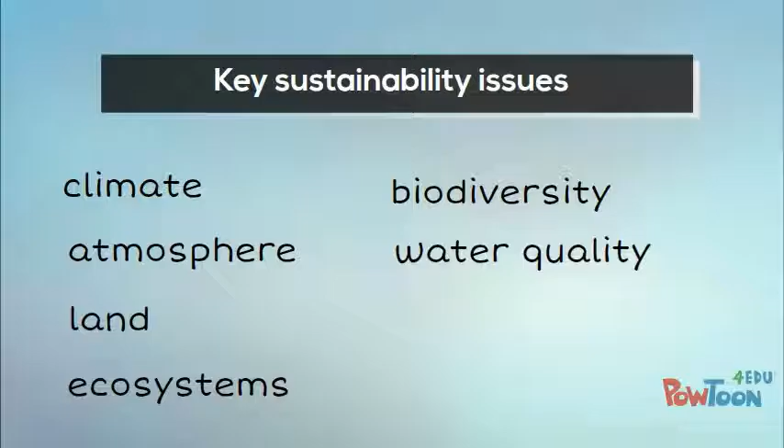natural environment. Unsustainable activities have led to changes in our environment or have been identified as having the potential to lead to future changes. The types of changes that are occurring or are predicted to occur form the key issues for sustainability. Key sustainability issues can be global and/or local, such as climate and atmosphere, land, ecosystems and biodiversity, water quality, waste disposal, and natural resource management.

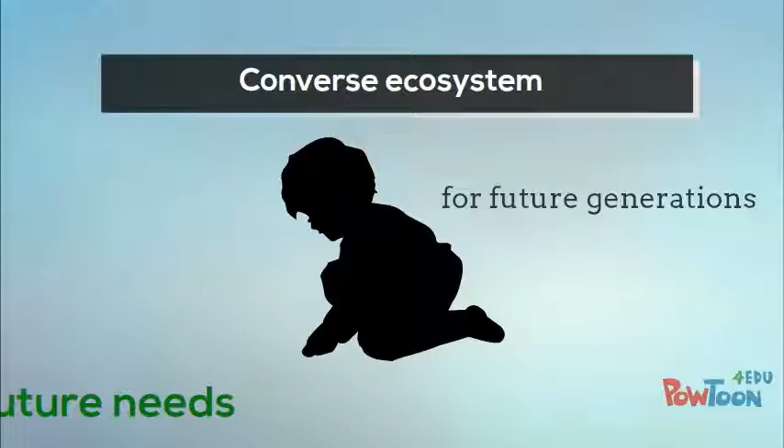Ecologically sustainable development is a major challenge for Australia. It is critical that Australia use its resources to develop industry and generate employment and thus meet the needs of Australians today, and that it use environmental resources in a way which maintains and where possible improves their range, variety and quality, while concurrently doing this in a way that conserves the ecosystem for the benefit of future generations.

Apparently, we are well on the way to doing this, but as new technologies emerge, things need to be re-evaluated. The government is amending the Australian environmental regulatory requirements, which includes large-scale wind farms and which subjects them to these requirements at each phase of the project. Thus, it is possible for sustainability and sustainable development to be used to balance competing interests and needs. To do this effectively, it is important to consider sustainable work practices and their management.

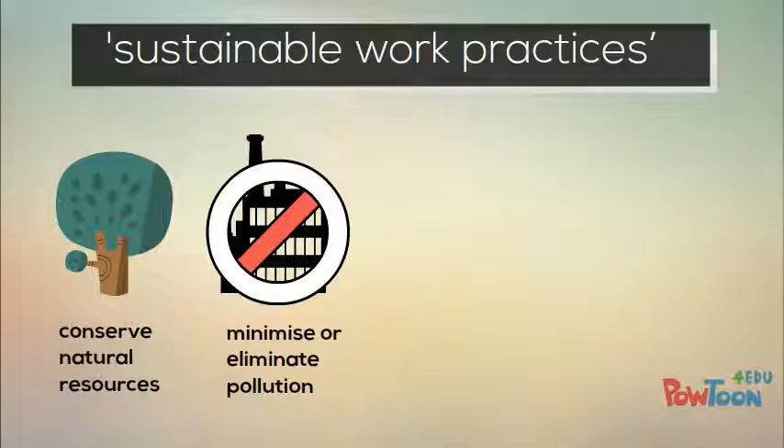Sustainable work practices include practices that conserve natural resources, minimize or eliminate pollution, are energy and economically efficient, and have a reduced impact on the health and safety of workers, communities, and the environment. What key strategies are used to manage issues? The primary role of wind farms is electricity generation from renewable resources, so it is a strong advocate for the promotion and implementation of sustainable and environmentally sound work practices.

The main sustainability energy principles and practices relevant to the renewable energy industry include the Operational Environmental Management Plan, which provides a framework for controlling potential operational impacts on the environment and which includes practical and achievable performance requirements, mitigation strategies, monitoring systems, reporting and auditing processes, and processes for implementing corrective action.

Environmental monitoring programs should include all activities that have been identified to have potentially significant impacts on the environment, both during normal operation and during unusual conditions, and should be based on direct and indirect indicators of emissions, effluents, and resource use, and be conducted by qualified personnel, following best practice monitoring and record-keeping procedures, and using properly calibrated and maintained equipment. Using renewable energy sources and reducing and effectively managing commodities such as energy and water.

Researching and adopting emerging technologies, including using energy-efficient devices or appliances to minimize energy consumption. Wherever possible, employing waste minimization strategies. Remember, these also have economic benefits and reduce operational costs. Let's look at some specific issues related to wind farms.

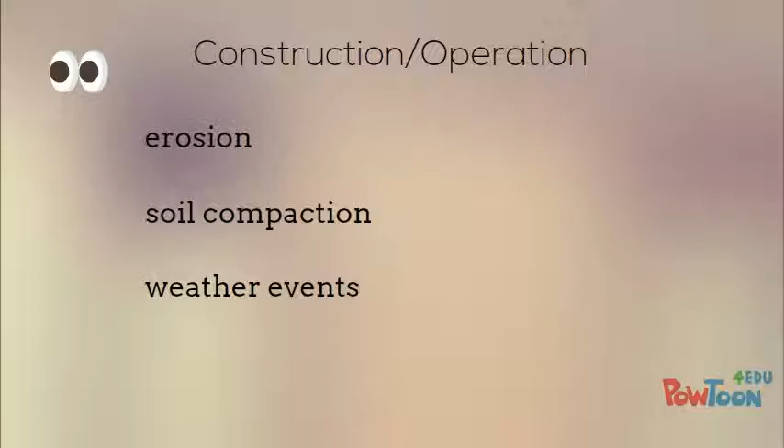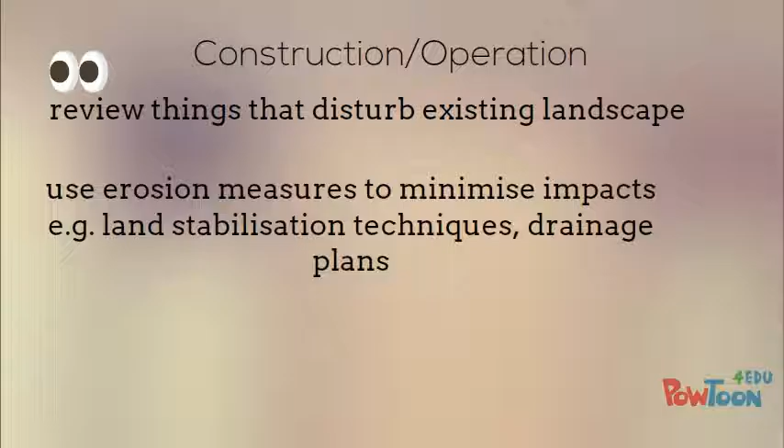Erosion, compaction of soil, and significant weather events, for example, which occur after periods of high rainfall, can affect the condition of the land and civil assets at wind farms. Implement appropriate erosion measures. Clear land promptly and revegetate with local seed stock of native species.

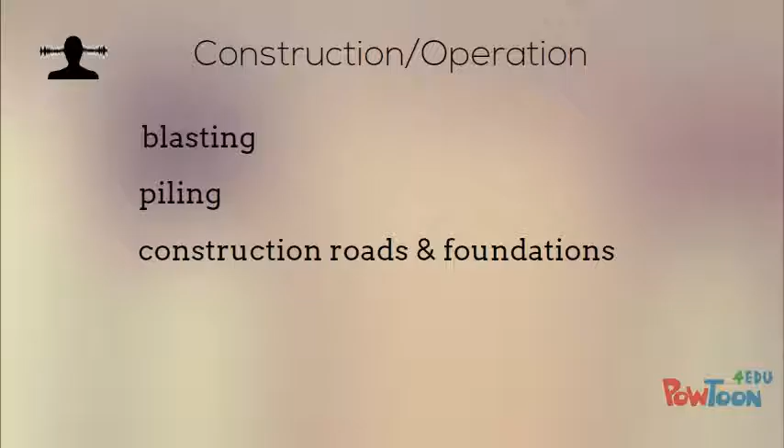Noise can occur during the construction and operational phases. Construction noise can occur from blasting, piling, construction of roads, turbine foundations, and erection of turbines. This is of key importance to those living nearby.

Noise-specific guidelines regarding environmental noise impacts from wind farms are directed by planning authorities and subject wind farms to strict guidelines from such sources as regulatory requirements, environmental impact statements, environmental noise guidelines, and direct community consultation. Modelling, monitoring, and reporting are independently conducted as directed by the planning authority.

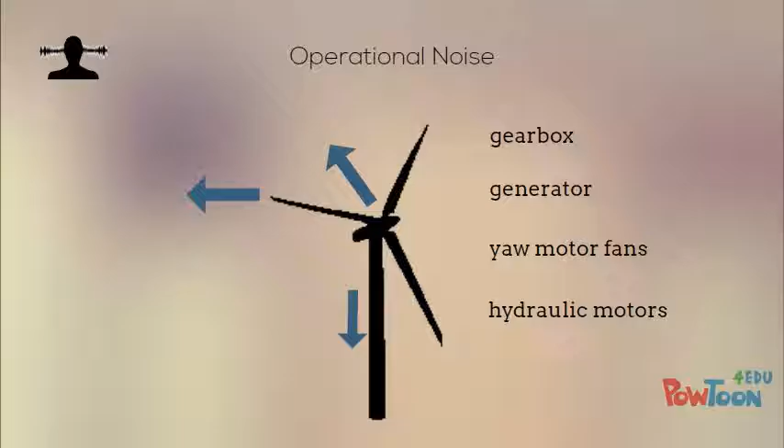Operational noise. The mechanical components of turbines produce mechanical noise that is radiated by the surface of the turbine and by openings in the nacelle housing. The interaction of air and turbine blades produces aerodynamic noise as air passes over and past the blades. Wind turbines make more noise as the wind speed increases.

This also increases the overall background noise. Noise mitigation measures are mainly related to engineering design standards and turbine siting. Aerodynamic noise will continue to reduce as the airfoil designs improve.

When the wind farm is operational, it is important to monitor noise and adhere to noise guideline values. This helps verify the modelled noise levels at nearby properties and confirms how effective current mitigation strategies are.

Wind farms have the potential to create adverse impacts on flora and fauna. The impact may be direct or indirect and may occur during the construction, operational, and decommissioning stages. Consent must be sought from management when native vegetation needs to be disturbed or has been damaged. One way to minimise this is by restricting vehicles to existing made tracks and roadways. When activities have damaged natural vegetation, this can be offset through extensive native tree planting.

The location of turbines may affect wildlife in many ways. The location may disrupt the daily movement of birds and bats. It may represent a barrier to migratory patterns of certain wildlife. The location may disturb or damage native vegetation. The infrastructure may increase the risk to certain species.

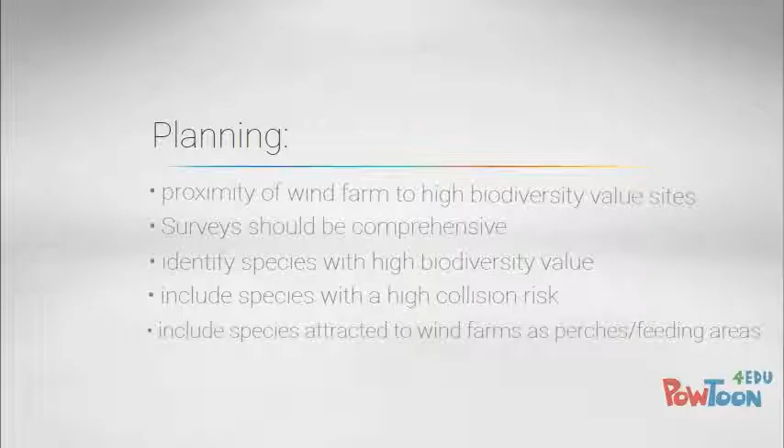They should include species with a high collision risk, such as certain soaring, aerial displaying, migratory and flocking birds, birds of prey, and migratory tree roosting and insectivorous bats. They should include species attracted to wind farms as perches or feeding areas, including those with behavioural tendencies to perch on power lines and related structures.

Assess collision-related impacts to birds and bats, including searching for carcasses. Sometimes, post-construction monitoring also includes surveys of the use and movement patterns of birds and bats in order to build a more complete picture of the situation. Avoid attracting birds to predictable food sources. This is especially relevant when carrion-eating birds are present.

Eliminate freewheeling when turbines are not generating power. Avoid artificial light sources where possible. White steady lights tend to attract insects, which attract predators. Avoid steady or slow blinking lights. Red or white blinking lights or pulsing lights are preferable.

At all stages, it is important that the worksite is rehabilitated and kept clean. This includes controlling spills, although the size of the spill will determine the extent of rehabilitation actions needed. Some instances require that the incident is reported to the EPA. Another issue at wind farms occurs from noxious weeds and pests that must be controlled and managed.

Shadow flicker occurs when the sun passes behind the turbine and casts a shadow. As the rotor blade rotates, shadows pass over the same point, causing an effect called shadow flicker. It is an increased problem when residential properties, educational or health facilities are located nearby or face the wind farm. It tends to be more pronounced in higher latitudes when the sun is lower in the sky and casts longer shadows.

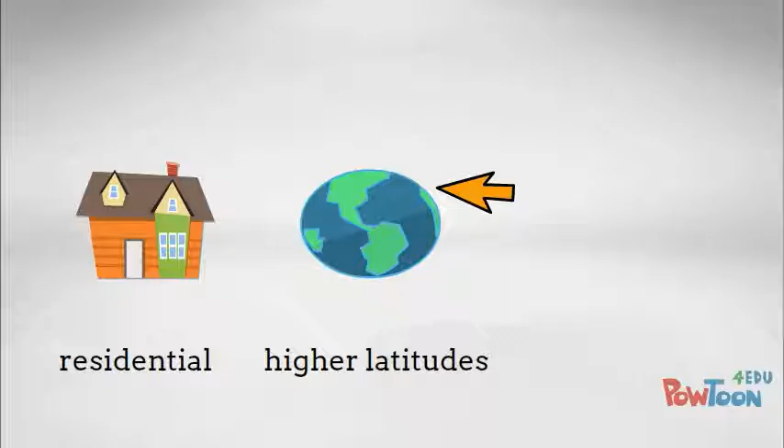Previously, blade or tower glint occurred when the sun reflected off a rotor blade or tower that was at a particular orientation. Modern wind turbines are painted with a matte, non-reflective finish, so this is no longer considered a significant issue. The installation of turbine foundations, underground cables, access roads, and other ancillary infrastructure may result in erosion, soil compaction, increased runoff, and sedimentation of surface waters.

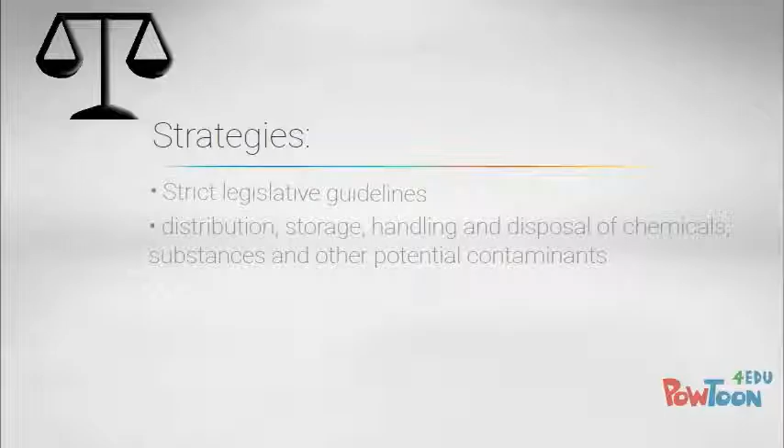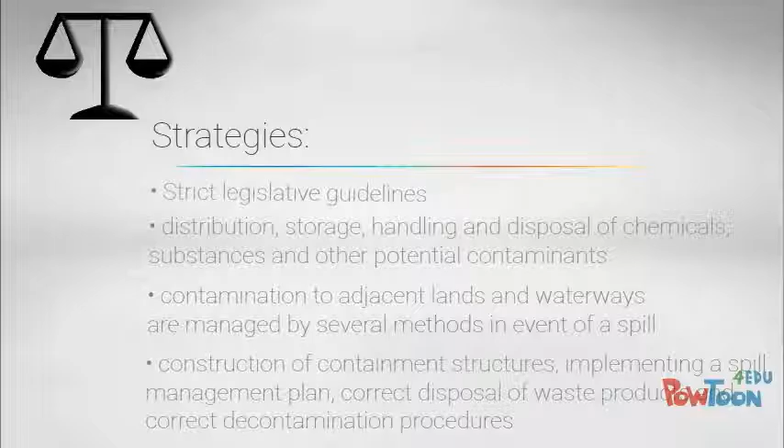Strict legislative guidelines, particularly when it comes to distribution, storage, handling, and disposal of chemicals, substances, and other potential contaminants, are followed during operation and maintenance activities conducted on a wind farm. Contamination to adjacent lands and waterways is managed by several methods, including the construction of containment structures to contain any potential minor and major leaks, implementing a spill management plan, correct disposal of waste products, and correct decontamination procedures in the event of a spill.

Measures include watering or covering exposed areas. This helps minimize or prevent air pollution and dust. Works are not carried out during periods of strong winds or in weather conditions where adjacent areas could be affected by the high concentration of airborne materials and dusts.

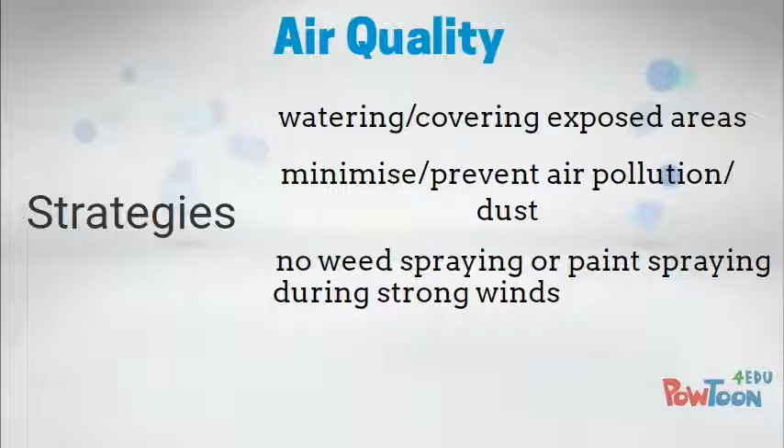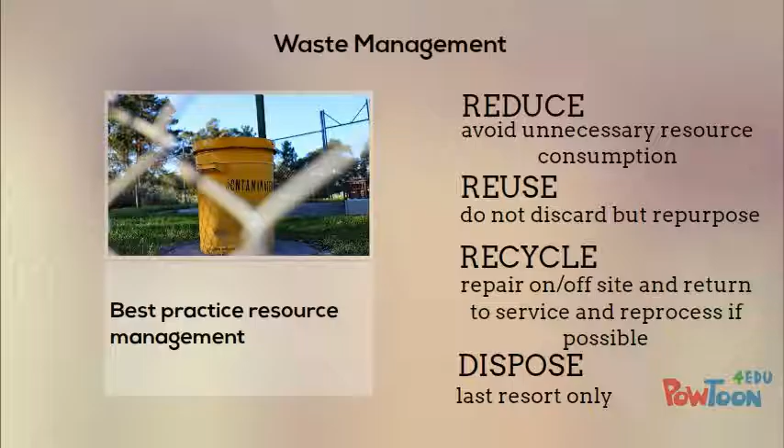Best practice resource management includes reduce, reuse materials if possible, recycle and reprocess. Some components are repaired either on or off-site and returned to service. Reprocess if possible. All oily rags and spent gearbox oils are collected and reprocessed off-site. Waste packaging material like cardboard and pallets are collected and sent off-site for recycling. Dispose. Undertake this as a last resort, but dispose of waste where relevant as general waste.

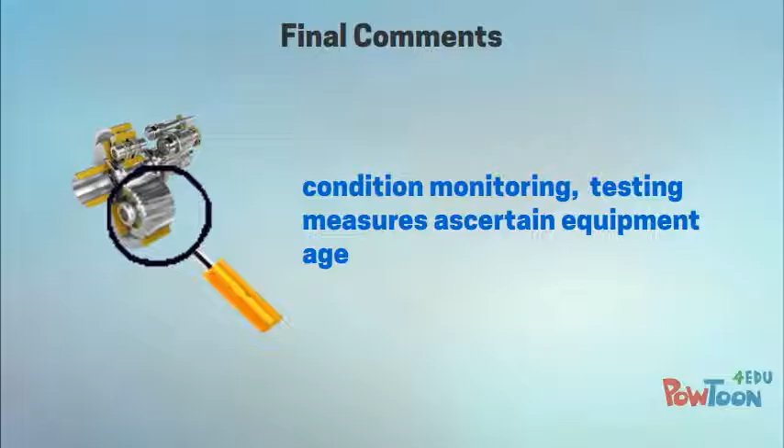Condition monitoring and other non-destructive testing measures are employed to accurately ascertain equipment age, including laboratory-conducted oil and grease sampling, thermography, and vibration monitoring. Remember, a good guide will always be contained in the environmental checklists and ensure you know the requirements for follow-up of non-compliance. Independent third-party audits may also be a good source of information about what is happening at a specific site.

Some instructions will also be contained in the JSA or JSEA, so consult the JSA or JSEA prior to starting any task. There are international environmental health and safety guidelines developed for the wind energy sector. These guidelines are comprehensive and address industry-specific impacts and management of both onshore and offshore wind farms.

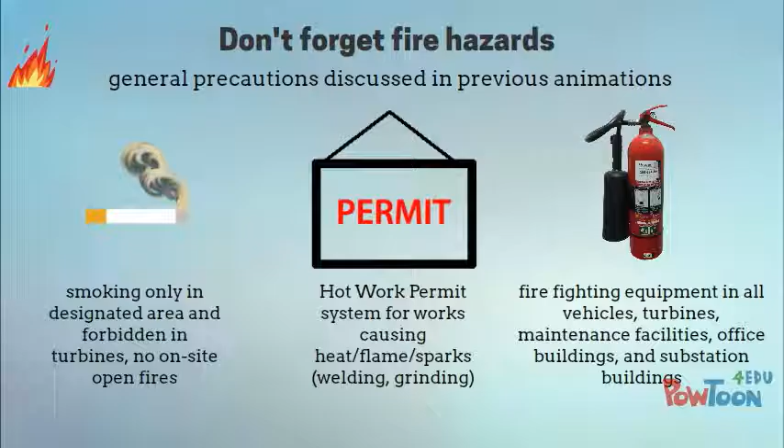Remember also that significant damage can occur from a fire. General precautions have been discussed previously. It is also important to note that due to the risk of petrol-powered vehicles igniting grass fires, only diesel-powered vehicles are permitted on a wind farm.